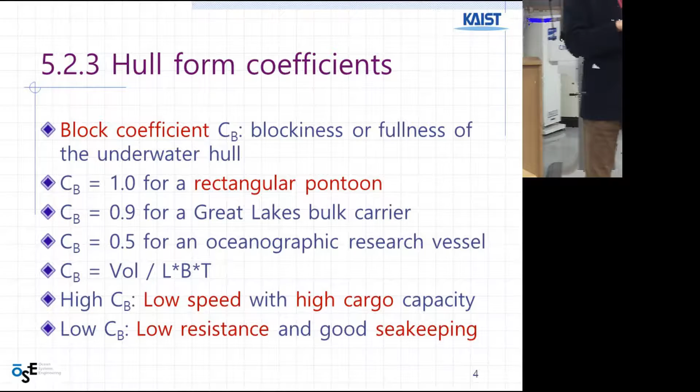The biggest 3 automotive companies inside America, United States, what are they? The big 3 automakers of the USA.

Chrysler merged, not now, 10 years ago, into Daimler of Germany. Merged with Chrysler, right? So now it's Daimler Chrysler. And all 3 of them, the biggest automakers of the United States, have their headquarters located in Detroit. That's why Detroit is the center of the automotive industry, right?

Because there was so much raw material around the Great Lakes, and also at that time, 120 years ago, transportation was mainly by ship rather than car or train. 120 years ago, transportation was mainly ship along the Great Lakes.

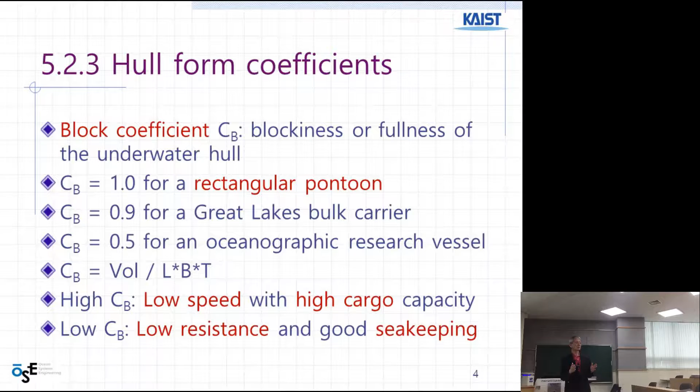So the raw material comes from the north side through the ship, but the ship has to pass through the canal between lakes. And then, once again, like the Suez Canal or Panamax, that's why they have a limitation of breadth, but they want to transport more cargo. So their shape is very long. Breadth is limited, so instead they make it longer.

So the block coefficient reflects fullness. Because it is long, the middle body is almost box-shaped, only the end part is ship-shaped. So the block coefficient is elongated, the coefficient grows higher, right? That's why they have a value of 0.9.

But the problem is they are slender, right? So the bending moment is very high, and the weakness is at the midsection. Question?

It's only possible because in the Great Lakes, the wave is not as big as the Atlantic or Pacific, so even though they are slender and long, the bending stress is allowable at that position. So there's a special shape for bulk carriers there.

And the oceanographic research vessel is smaller compared to cargo ships. So very small ships usually have no middle body, no parallel middle body. Parallel middle body means, like the Great Lakes ships, almost 80% is the same box shape, only the end portion, 10%, is ship-shaped, right? But a smaller ship, like a fishing boat, has no parallel body, right? Just front and end, that's it.

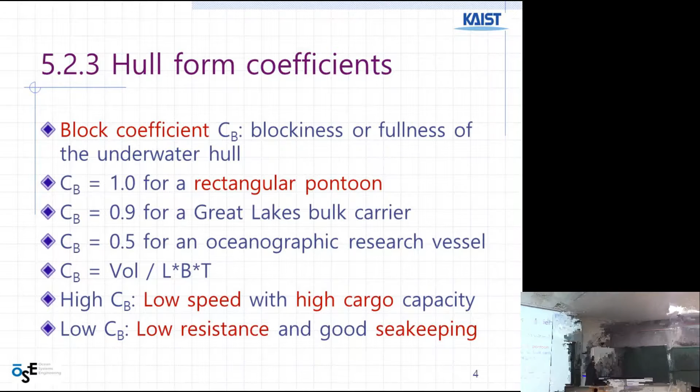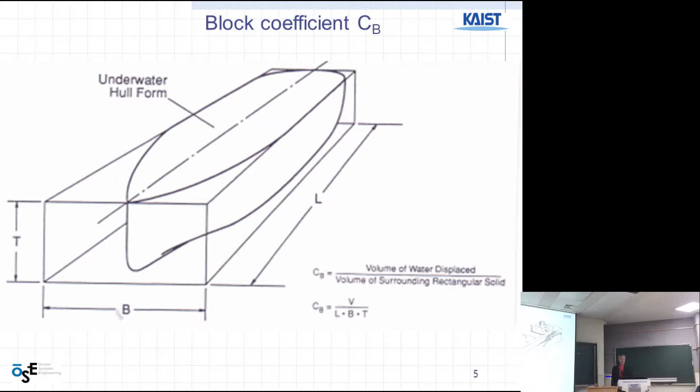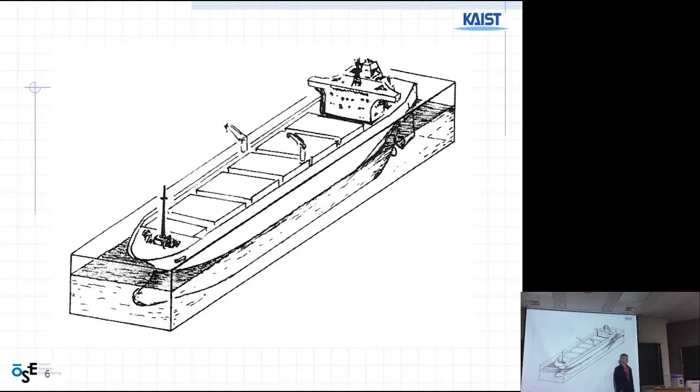You may see that there is also an above water body, right? Above water body, but that is not calculated for the CB - all including superstructure and also a deck, main deck, and other hatch cover. But the calculation is only for underwater body.

Midship section coefficient - there is also a maximum section coefficient. CX is midship section coefficient, and AX is underwater area. Underwater area, midship section, but only underwater section, not above water. And then divided by B multiplied by T. And prismatic coefficient is another one.

So they are saying M or X. Sometimes they are saying M - M means midship section, X means maximum sectional area. For a long ship, the midship section is long, or the parallel mid body is long, so that midship section is okay.

But for the, say, yacht - sailing yacht, do you know how it looks like? Usually they have a sharp front, but the back side is bigger toward the back. So that midship section is not the maximum area. Maximum area goes toward a little bit behind the midship in case of a sailing yacht. That's why they divided into two different - CM and CX are different for small ships. But for big ships, CX is the same as CM.

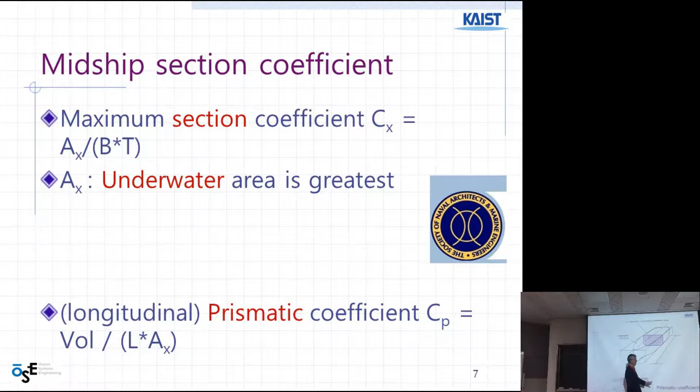Prismatic coefficient is divided by AX rather than BT. So graphically it looks almost the same, but the difference is this corner. The denominator is not L times B times T, but L times AX. So this is the prismatic coefficient. We care about this coefficient because it gives you a different property of the ship.

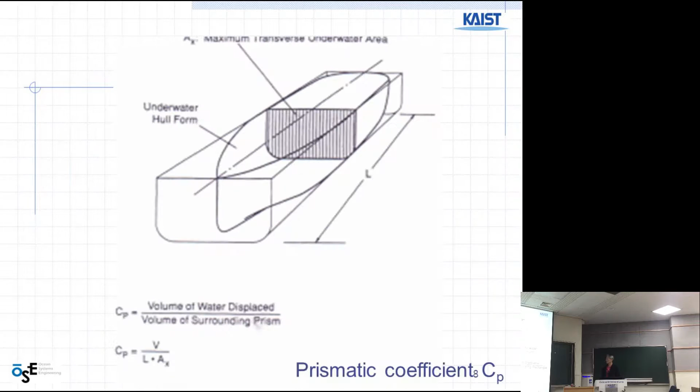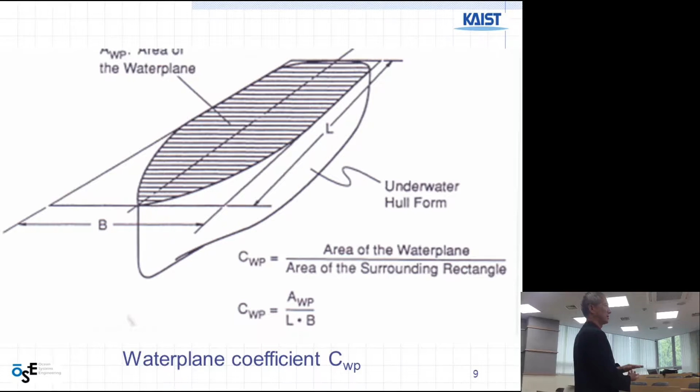So we call this a hydrostatic spring. And the spring constant is related to area - this area, the waterplane area. Because when we push down 1 centimeter, the area and 1 centimeter of volume is displaced - displaced water. Force is the same as the displaced water. So I push down 1 centimeter by force, and that force is the response of the displaced water. So the spring, same as a spring - the response is not so fast like this one, but slow, but still the same mechanism. So we call it hydrostatic spring, spring constant.

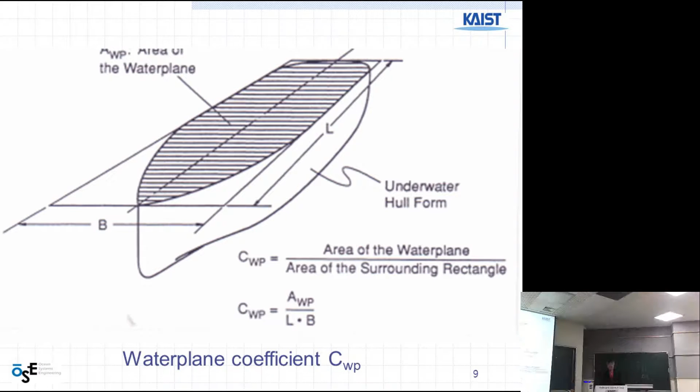Speed, Froude number - have you heard about Froude number? Yes? No? All right, how about Reynolds number? A long time ago, you heard about this, right? What is the difference between Froude number and Reynolds number then? Both are non-dimensionalized numbers, right? To measure speed somehow. Somehow they want to measure speed related to something by using a non-dimensionalized coefficient way, right?

So we'll see, I don't remember this. Probably force—one is force, so it's related with viscosity. Viscosity is related to the area. The other one is inertia. Inertia is based on mass, right? So it's volume and area. That is the difference, but we will see next time.

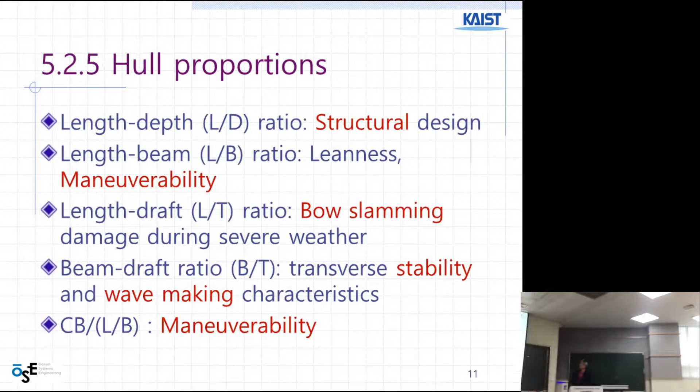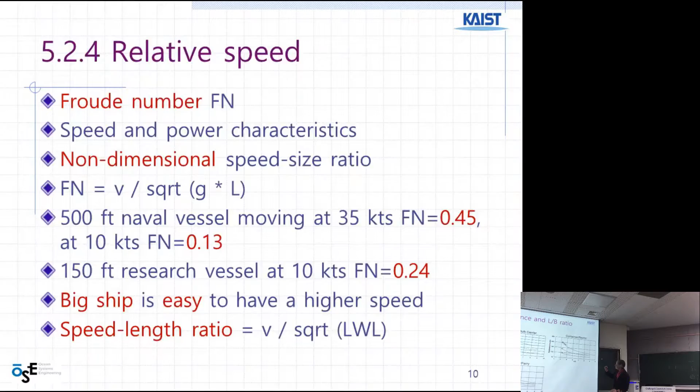So if you increase the length-breadth ratio, that means more slender, more slim. That means your resistance is lower at the same speed.

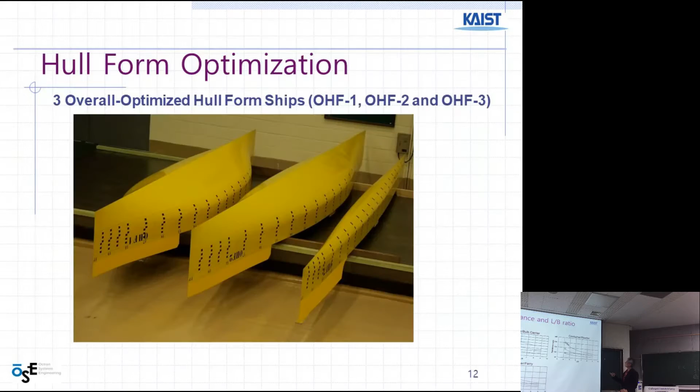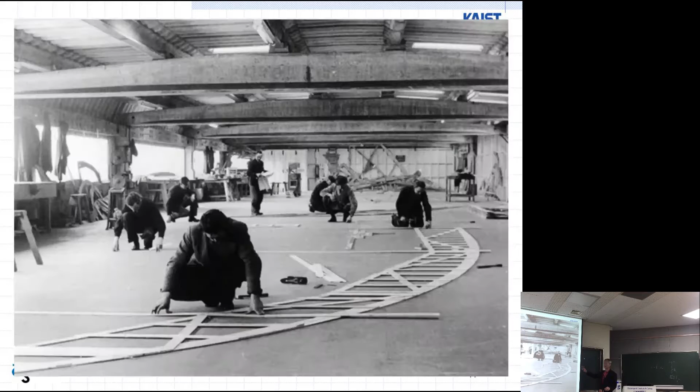Hull form, lines drawing - general approach and techniques. This is the mold loft. There's a picture - an old picture from, say, 100 years ago. This one is one section of the ship, this curve - one section of the ship.

Do you know how to make a yacht?

What is the material for making a yacht? Plastic? Looks like plastic. Right, we call it FRP. What is FRP? Fiber reinforced plastic. So plastic, but reinforced by fiber. Which kind of fiber? Glass wool, something like that, right? Glass wool.

So when you make an FRP ship, boat, or yacht, you need a fiberglass fabric, very similar to this one. Looks different, but it's fabric, right? Like cotton. You cut it, then shape it, and then paint it with plastic resin. They call it resin, right? The smell is not good, but anyway.

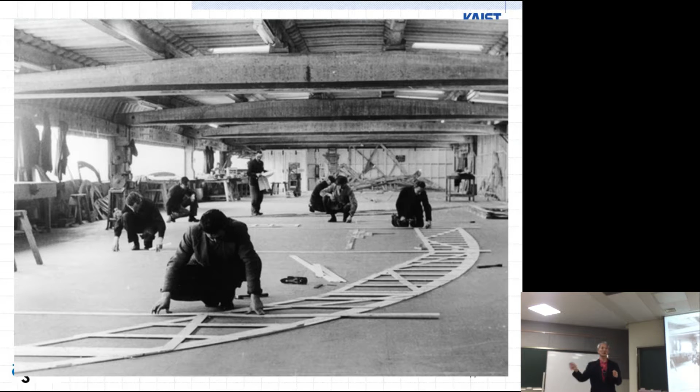Right? It takes time. It's not easy. In old days, you needed to do this at real scale - curves of each section of the ship. They did this 100 years ago. Now, no more - they do it by computer.

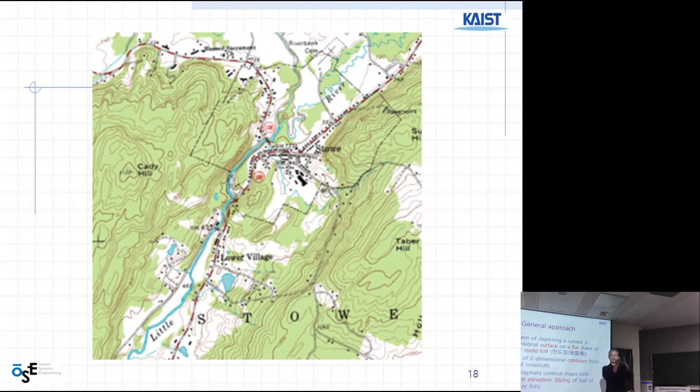So there is a technology you need to learn about this. This is a three-dimensional surface, freeform surface - airplane, car, automotive, also right? Three-dimensional surface, freeform, good shaping. But you need to make this out of a flat surface plate. Airplane, automotive, ship, all of them - the final product is a three-dimensional freeform surface, but you make them based on a two-dimensional flat plate.

You cut it - glasswool is the same, right? You cut and shape, then gather together, putting together, joining or welding. So it is complicated. It's a series of two-dimensional contours, meaning contour curves from parallel cross-sections. Cartographers use geography, maps, constant elevation, right? Slicing of fish, same thing.

So this is mold loft. This is a geographical sectional curve, right? Sectional curves, same as sectional curves. And this one we call the lines drawing: body plan, sheer plane, half-breadth plane. Half-breadth plane together - it can be a water plane. And this one is sectional curves, right?

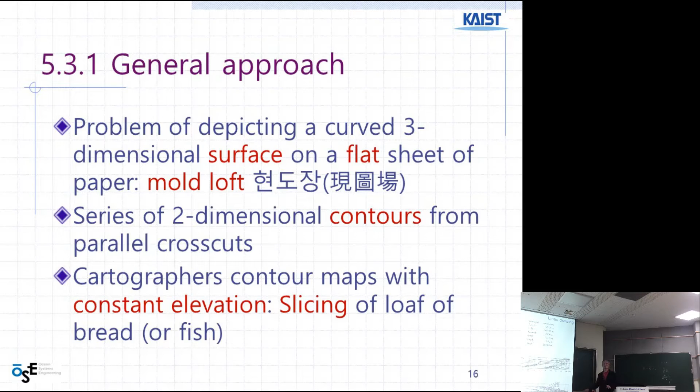This one, sectional curve. And mold loft - you make this, putting them together, arranging them in between, and then putting on FRP glass wool. And this one is the main drawing I told you about, the lines drawing.

What are the three main drawings for ship design? General arrangement, lines, and midship section drawing.

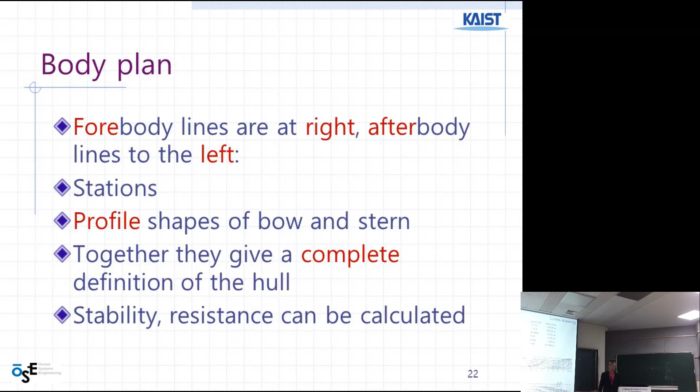For the structure. So this is a lines drawing, one of the main drawings, right? We call this the body plan - vertical plane, water plane, lines. This one is body plan, water plane; sheer plane is vertical lines. Same thing but different name - sheer plane or vertical line.

Right. And main dimensions - length. What is LOA? Full name of LOA? What is LOA? Nobody knows? Ah, length overall. Length overall. LBP?

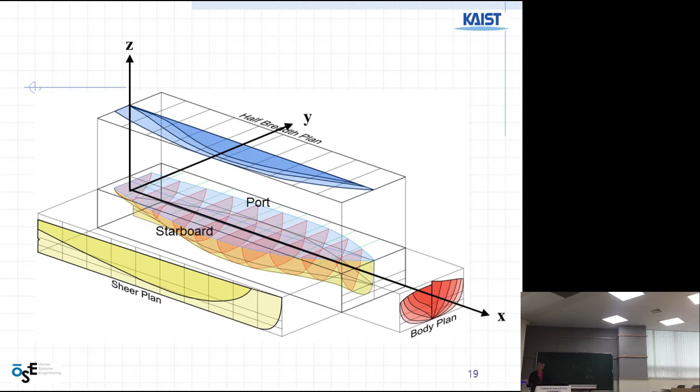I explained about AP and FP. Between the two P's, this is LBP. Right? FP, AP, and between the P's - length between perpendiculars, LBP. And FP is fore peak, or fore perpendicular. And AP is after peak, or after perpendicular.

Breadth, depth, and displacement - somebody should calculate this. When I was a student, this was given to me, and I had to make a 3D surface using paper - a paper ship. Same as a shipyard - a shipyard makes a ship out of steel plate. Instead of paper, using these drawings, they build the ship. Same as me as a student - I cut off papers and somehow put them together, making a ship. Right? Outer surface, not internal, outer surface.

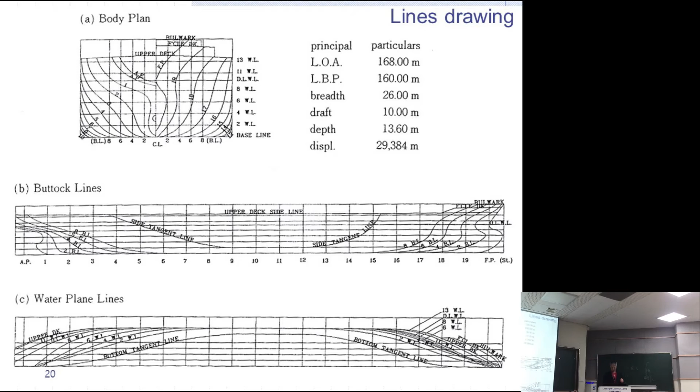Designing something like the hull of a ship can be an expensive process. So how do you rigorously test out a design before you even build it? A unique research program at the University of Iowa makes that possible using sophisticated software, model ships, and an enormous indoor pool.